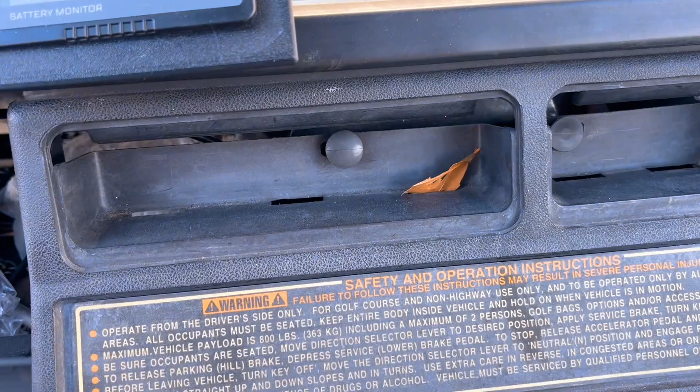Alright, so the issue is we bought this golf cart and it had these empty spaces here where plates used to cover. I'm not exactly sure what would go there, but I'm going to cover them up and actually integrate our shunt battery monitor into it. Right now you can see it's definitely not properly hooked up. We don't have 0% battery life, but I've got to get that hooked up right too. But I want to integrate it into the dash.

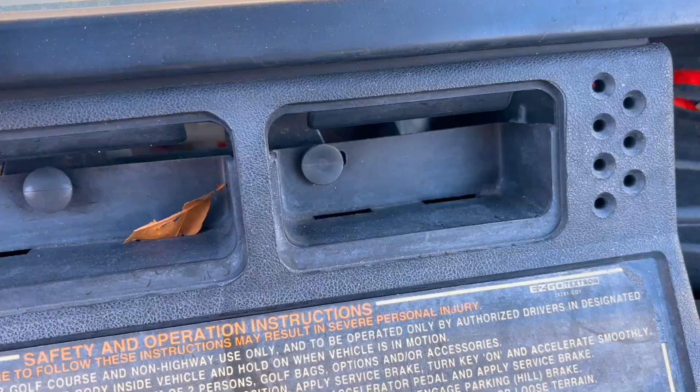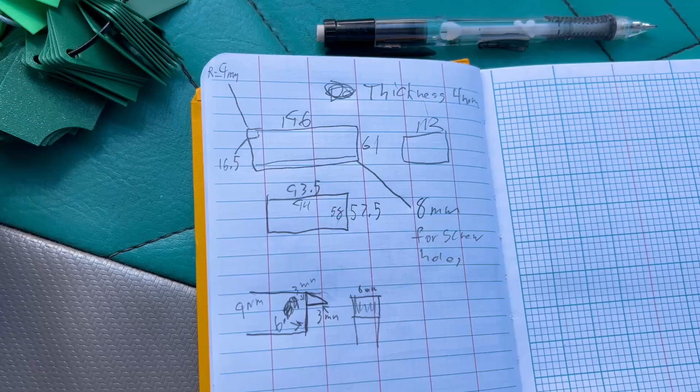These are by no means professional engineering drawings, but these are my dimensions. You might not be able to read them, but I know what I wrote down, so it makes sense to me.

I'm using these cool little 3D printed radius gauges that I made to determine the radius of this over here. Obviously this one's too big. I think the radius was 9 millimeters, yeah, 9 millimeters is what I put down. These are very helpful little tools if you're into making at all.

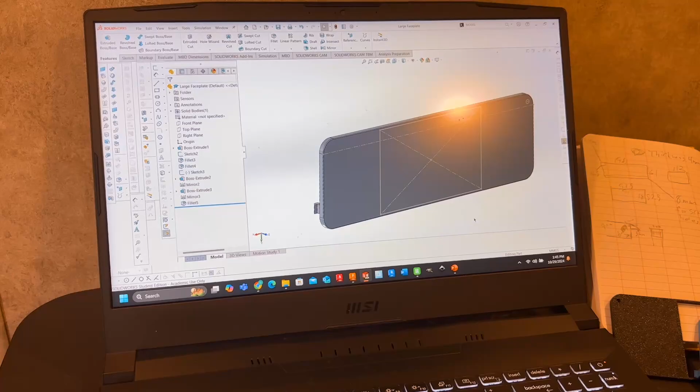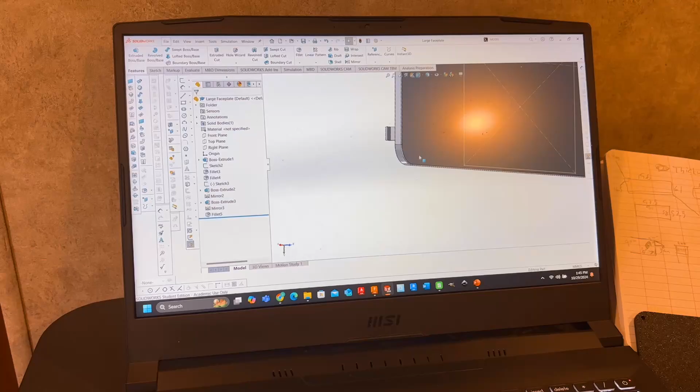Alright guys, I wanted to give you a little look into how I designed these face plates. I put them in SolidWorks, which is a professional CAD software. I also use Fusion, Autodesk Fusion, for 3D modeling. So this is pretty much it - it's just a very simple plate with a fillet, and then this little latch here. This is the large face plate.

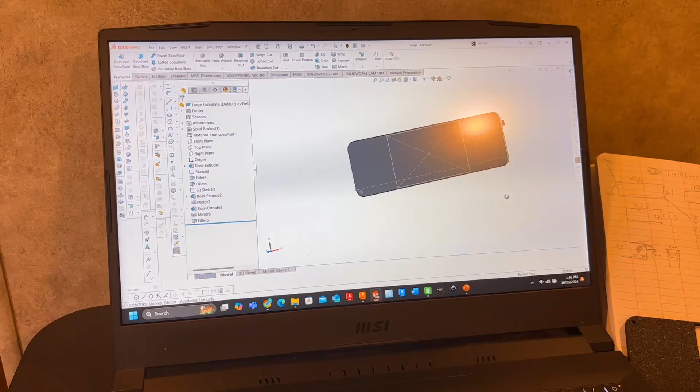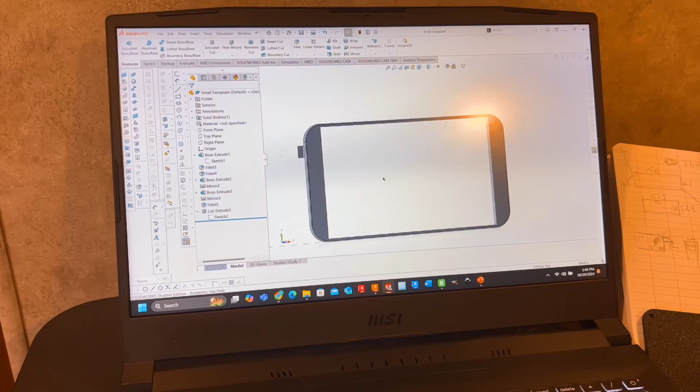As you can see, this box in the middle here is where I had originally - and of course I have the whole design upside down - but I had originally thought about putting the battery monitor on the large plate, but I discovered that it fits perfectly on the small faceplate, as you guys have seen or will see shortly. So I went ahead and put the cutout in the small faceplate so I could leave more room in the big faceplate if I wanted to throw other switches or whatnot on the dash there.

So yeah, this is the software that I modeled it all in, and then I take it over here to Bambu Studio, which I have Bambu Lab 3D printers, and throw the STL into Bambu Studio and send it to my printers from there.

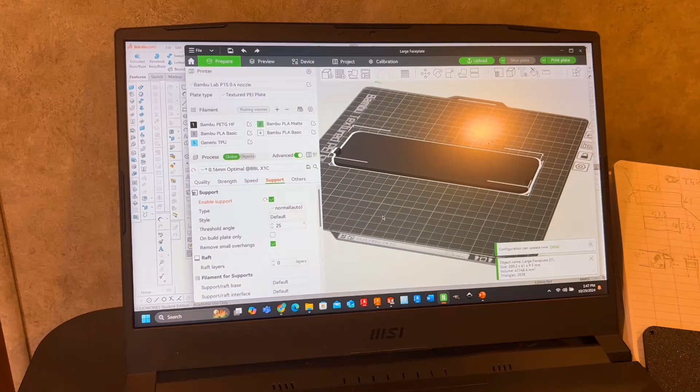Alright, so I've made a PLA version of what I believe is going to be the final version, and PLA is just a type of cheaper 3D printer plastic.

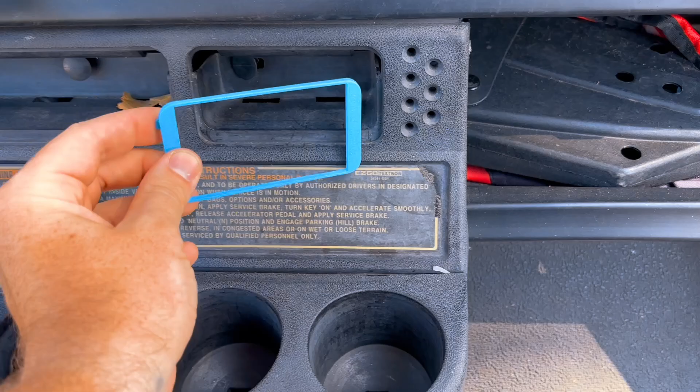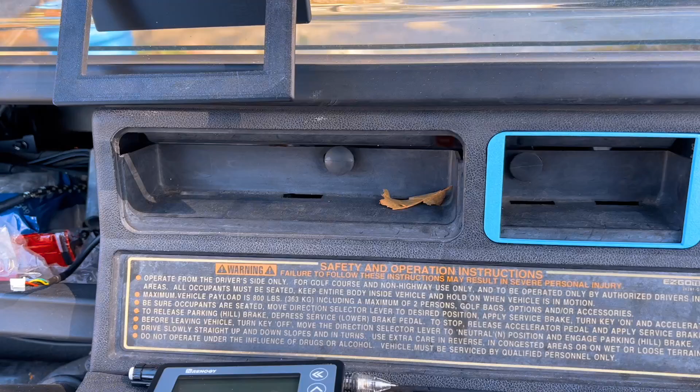All right, it looks like it's gonna fit. The only issue I'll have is that lip, because it doesn't look like it's gonna fit. So my goal is to put this battery monitor into this side, and then I'm just gonna do a flat panel right here. Maybe eventually I can cut holes and put different switches, but for right now I'm just gonna do a flat panel. So it looks like I'm gonna have to do a little trimming to this plastic. I just finished trimming it with the worst tool for the job, but I didn't bring all my tools down here to Florida, so that's what I got. I'm working with the hand I was dealt.

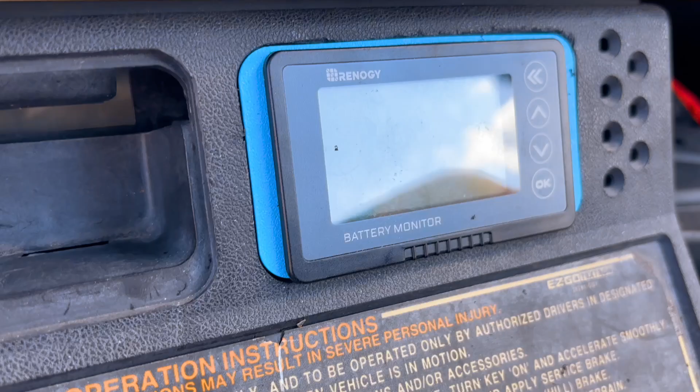All right, let's see if this fits. And the battery monitor — I think I nailed the measurements there. Look at that, looks like it fits. All right, good deal. Now time to print the final iteration of it.

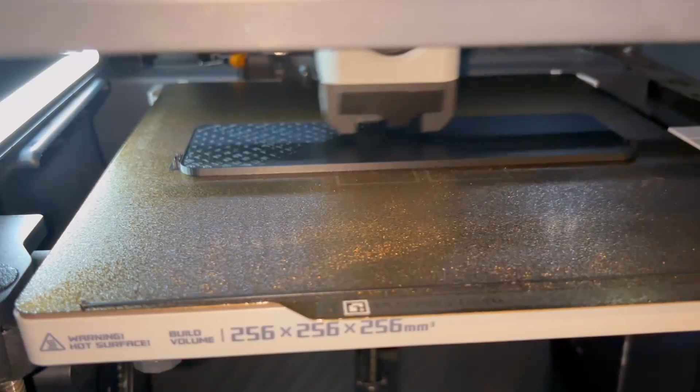It's kind of a mess, but here's a look into the plate being printed right now on my Bambu Lab P1S. And then I was doing the test prints over here on my A1 Mini.

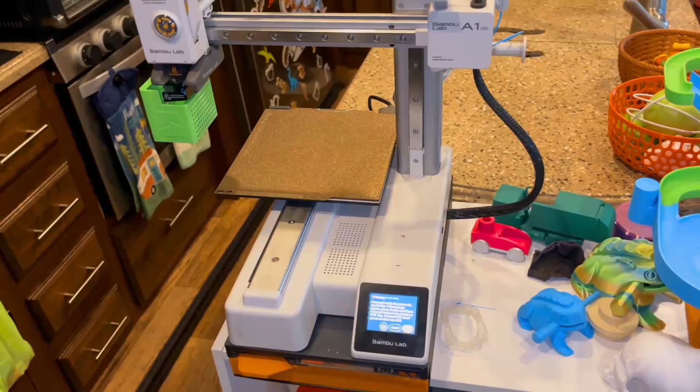For those of you who aren't too familiar, I realize I didn't explain the differences between the plastics I'm using. Most of the stuff up here, all the different colors, is PLA — it's your basic 3D printer plastic that just about everyone uses for just about everything 3D printed. I've also got some PETG HF, which I believe stands for high flow, something like that. That's actually what I'm printing the final faceplate cover things in. That's a pretty good filament for weather resistance and some chemical resistance.

It's good for outdoor use, and it's a lot more resistant to heat. It's not super UV resistant, but the golf cart is going to be covered — it's not seeing a ton of direct sunlight, so I'm not too worried about it. Then I've got some PETG carbon fiber, which is the same thing basically, except it's got little carbon fiber flakes in it — same as the regular PETG, which is what this is.

And then I've got some glass-filled nylon, which I've got sitting in the heater. And then a couple other little filaments here, but those are the main ones that I use.

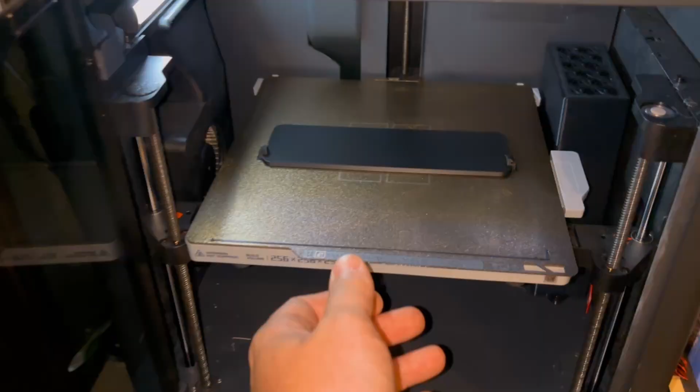All right, looks like the print is finished up. I'm gonna pull the plate off, let it cool. It's looking good. Let the plate cool, and then I'll take the print off and we'll go try it out. So I printed that for Reagan.

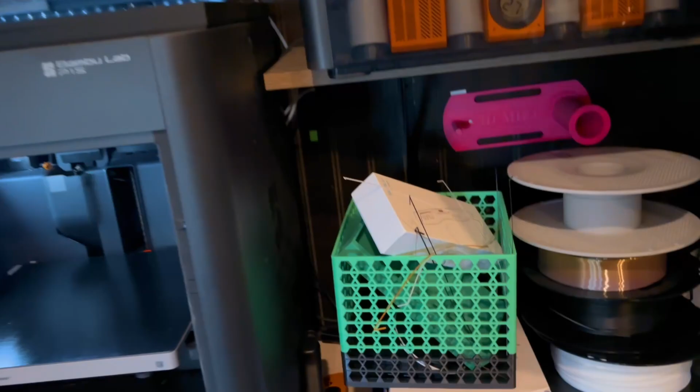Printed this little incense holder that's right now propping this thing up to let it cool. Printed a big marble run for our son. Printed this Halloween wreath — this whole thing is 3D printed. It's kind of cool, it's like Lego style.

Printed baskets, spool holders, cup holders. In the kids' room, there's a bit more here. Each of the kids has a cup holder that I've 3D printed so they can have a cup by their bed, or a bottle by their bed at night. Cheyenne has a Yoto player, so I printed this little station so you can store her cards here and wirelessly charge it there.

Charlie 3D printed her this nightlight thing, which, I mean, you can see, you're seeing our camper quite raw right now. It is not cleaned up at all.

3D printers have a whole lot of uses. I printed a little pencil holder, some Pokemon card holders, a rain stick. There's a whole lot you can do with 3D printers. They're pretty awesome. One thing I forgot to show you guys is this cool little picture holder.

I 3D printed it for our Instax photos. Instax is like the new Polaroid, Fujifilm makes it. They're little basically Polaroid pictures that can get stored in there, and you can have four of them on display. I just threw a few in there the other day.

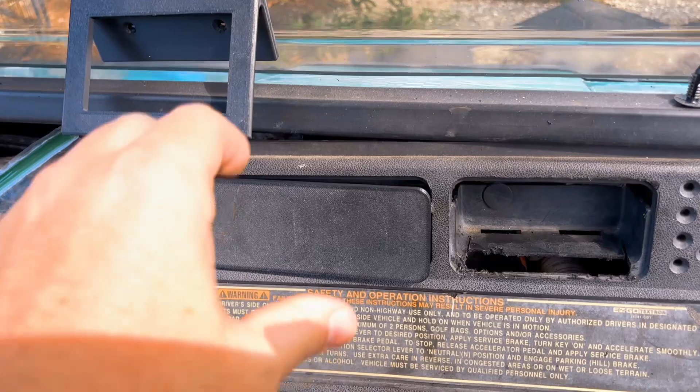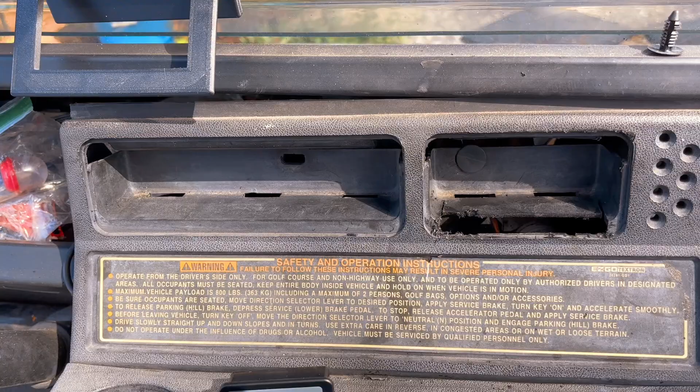All right, so it looks like I need to, unfortunately, take one millimeter off of the end of this. I can get it in there, but it bows out a little bit, and that's not what we want to happen. I want it to be able to come out fairly easy if it needs to. But overall, it looks like it's gonna work okay once I take care of that.

All right, we're gonna try this again. I went ahead and got the wire run already for the battery monitor, but moment of truth after.

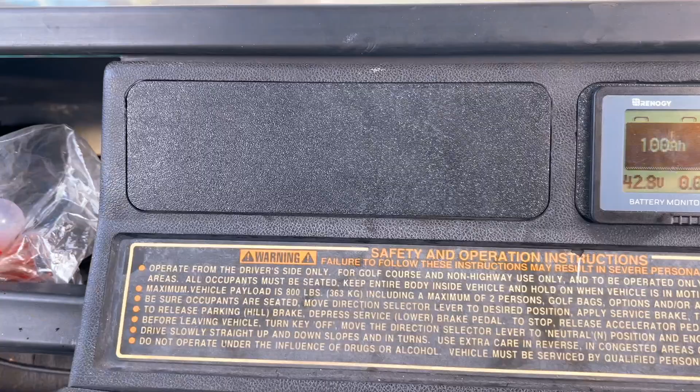I'm gonna have to do this off camera because I've only got one hand. All right, got both of them fitted in there, and it looks like it fit pretty well. I like the texture that I put on it.

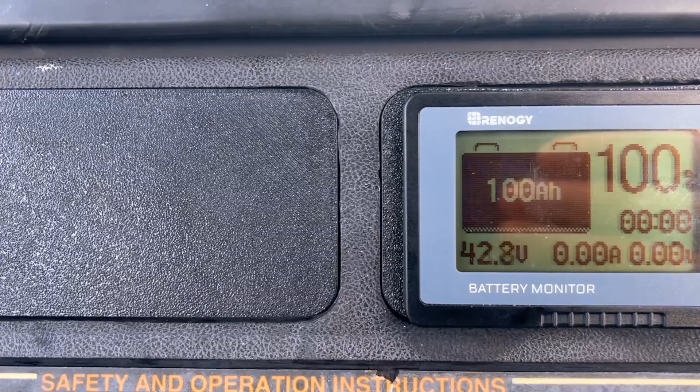It doesn't exactly match perfectly with the texture on the plastic here. It's a little shinier, but there's some texture there, and some texture on the little cup holder thing. So I think it works, and it looks a heck of a lot cleaner than it did. I'm happy with it.